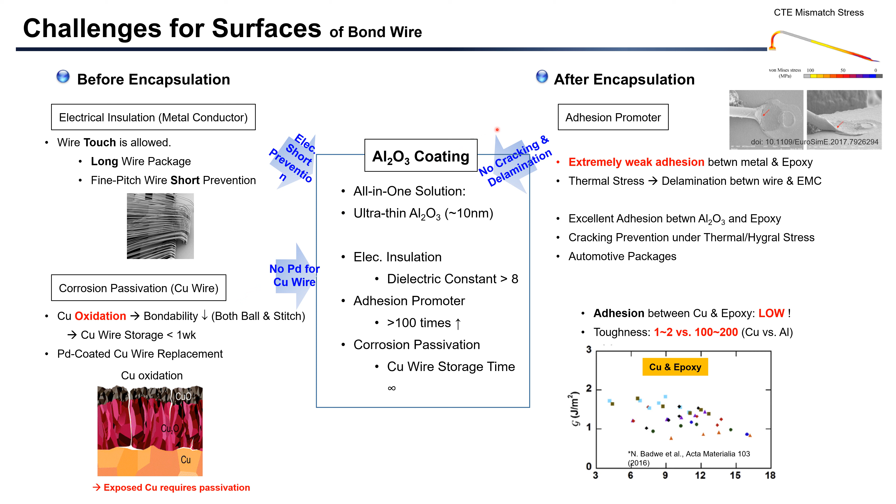Before encapsulation, metal bond wire does not provide electrical insulation. Metal wires do not provide corrosion passivation. After encapsulation, metal wires do not provide good adhesion to epoxy molding compound. On the other hand, aluminum oxide coating can provide electrical insulation, corrosion passivation, and good adhesion to EMC.

First, aluminum oxide coating on bond wire for adhesion promoter. On your left-hand side, wire cut is one of the typical failure mechanisms in harsh environment. Because of CTE mismatch stresses, debonding occurs between wires and EMC. This is an interfacial fracture between the wires and EMC. These interfacial cracks grow long enough and then a wire cut occurs because the wire alone has to carry all of the thermal stresses without help of EMC. Typical solution is to increase the wire diameter because the bigger wire can carry a bigger stress.

On your right-hand side, if we introduce aluminum oxide coating on the surface of the conventional bond wire, you can increase the adhesion so we don't have interfacial cracking between a bond wire and an EMC, so we don't get to have a wire cut failure.

For instance, on the conventional bond wire without adhesion promoter, when we apply the deposition of an outer metal additional layer so that we can induce the interfacial cracking, and when we apply the stitch bonding, which is nothing but external mechanical loading, we have seen terribly weak adhesion. However, when we introduced aluminum oxide coating as an adhesion promoter and applied the stitch bonding, we don't get to see any interfacial cracking. From a different perspective, because now we have a better adhesion, we can decrease the wire diameter for cost reduction purposes.

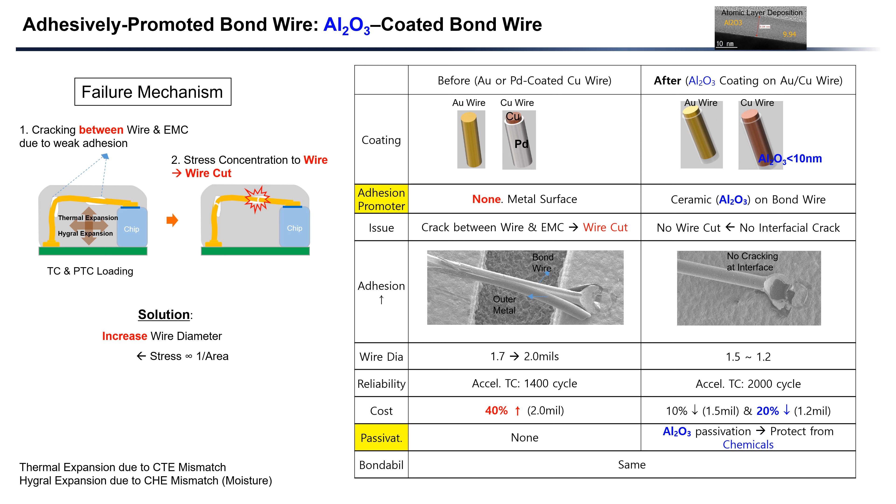Electrically insulated bond wire. When a bond wire has electrical insulation, they may touch with each other. There's not going to be an electrical short problem. And for this particular application of a long wire between two semiconductor chips over a long distance, this bond wire has to withstand its own weight. This is not very easy to do, but when a bond wire has electrical insulation, they may sag a little bit, they may sway a little bit, they may touch with each other a little bit. There's not going to be an electrical short problem. From a different perspective, if the wires are allowed to touch each other, we can also reduce the diameter of a bond wire for cost reduction purposes as well.

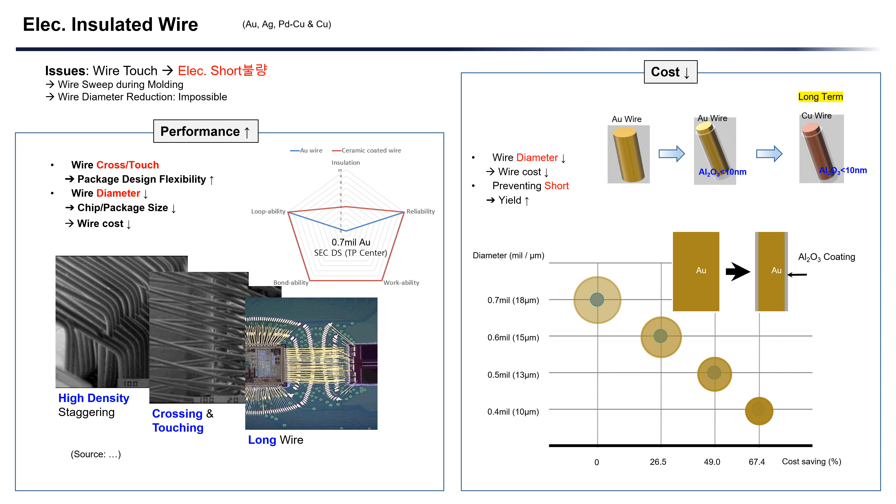On this slide, I'm going to explain how we ended up with coating aluminum oxide on bond wires. Previous work: at ECTC last year, we presented aluminum oxide coating on PCB copper pad. This year, we are presenting aluminum oxide coating on bond wires. On your left-hand side, at the top, you're seeing a gold wire bonded to a typical aluminum pad. This aluminum pad always has a native oxide on its surface, very thin aluminum oxide. However, it allows good bondability and reliability. That is described by this 2014 paper.

And on your right-hand side at the top, we made the deposition of aluminum oxide on PCB copper pad in order to replace conventional surface finishes of gold and nickel on top of copper. And we presented a lot of data in terms of bondability and reliability last year at ECTC. Today we are making a deposition of aluminum oxide on the surface of a bond wire. Why not?

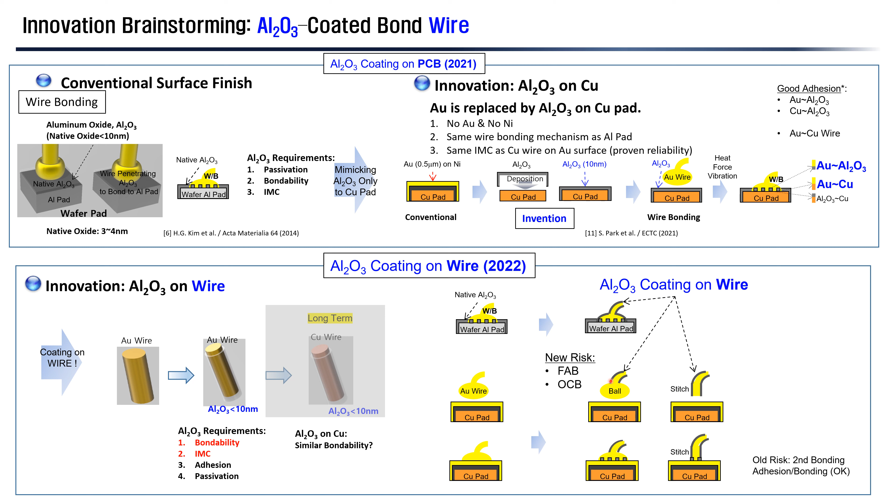The only new risk coming in as we introduce aluminum oxide coated bond wire would be free air ball formation and OCB, because a bond wire is completely surrounded by the aluminum oxide coating. That's what I'm going to talk about in the next slide.

Aluminum oxide was coated on a bond wire by making use of ALD, atomic layer deposition, because ALD is very well known for excellent conformal coating. Precursor for the ALD deposition is trimethyl aluminum, and H2O is a reactant. As a result, you get aluminum oxide deposition. Byproduct is CH4. A single process creates 1/10 of 1 nanometer, so you have to repeat the same process as many times as you want until you achieve the desired thickness of aluminum oxide.

On your right-hand side, you're seeing a special chamber for coating aluminum oxide on a bond wire. This is the chamber for the ALD process. You're seeing a special spool for coating aluminum oxide on the wire. When a wire winding is finished, this whole thing is moved into the chamber for the ALD deposition.

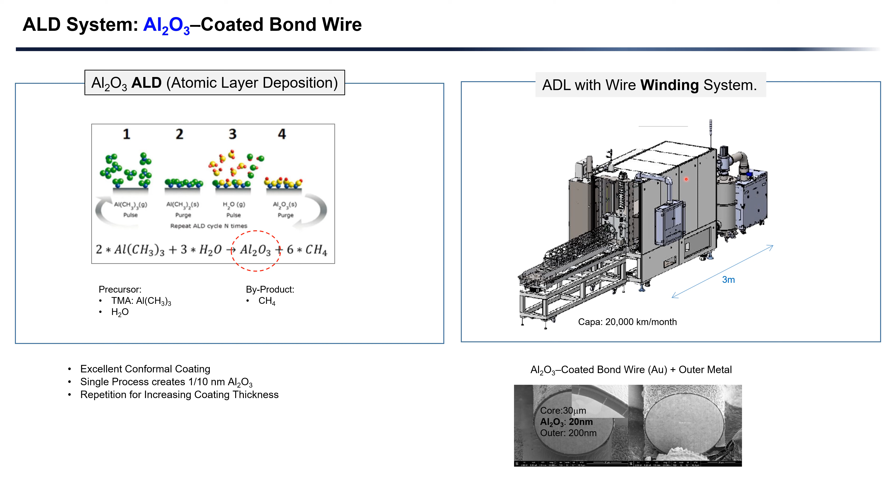On this slide, I'm going to show you the OCB sensitivity to the aluminum oxide thickness. The rule of thumb that we would like to propose is, for the case of a gold wire, when the diameter is greater than 1 mil, there's no OCB issue whatsoever with 6 nanometer thick or 8 nanometer thick aluminum oxide coating.

However, when you look at an ultra thin bond wire, 0.7 mil, there is a very strong sensitivity to the aluminum oxide coating. When aluminum oxide thickness is greater than 10 nanometer, we're seeing a very serious OCB formation. As far as the gold wire is concerned, with 5, 6, 7 nanometer thick aluminum oxide coating, there is no OCB whatsoever. We made a demonstration of 20,000 continuous bondings. We made use of a 0.7 mil gold wire and 6 nanometer thick aluminum oxide coating.

After we've done many tests, we came up with an OCB ranking. Number 1, conventional gold wire. Number 2, gold wire with aluminum oxide coating. This is very interesting. Number 3, silver wire with aluminum oxide coating, but no forming gas. No forming gas is better for the silver wire than forming gas.

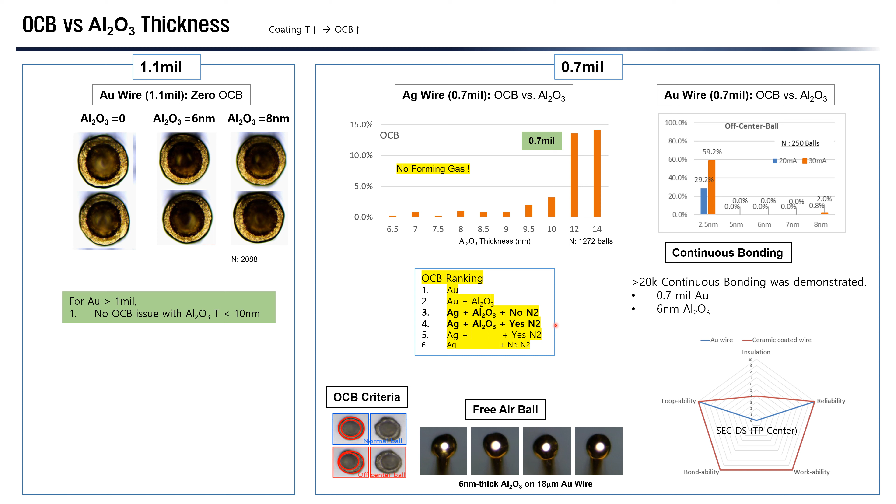On this slide, I'm going to give you a little bit of a sense of what the OCB mechanism is like. I'm going to explain why OCB is affected by the oxide on the wire surface and oxide thickness. When electrical energy is supplied to the bond wire, the bond wire is going to melt and form a molten ball, which is going to grow. But the bond wire right next to the molten ball, I would call it a TBMZ, to-be-melt zone, is nothing but a solid at a very hot elevated temperature. When a metal is exposed to high temperature, it is going to experience metal oxidation.

This oxide thickness depends upon wire material types and temperature. Of course, if this TBMZ oxide is very thin, there's no problem with OCB. If this TBMZ oxide gets thick, it does not break down gradually during ball formation. For instance, here on the left hand side the oxide layer is long, but it's not broken down yet. On the right hand side, the oxide layer has broken down, which creates a situation with no axis symmetry. Material is symmetric, geometry is symmetric, and the molten ball is symmetric. But the broken oxide layer on the surface of the bond wire is not symmetric, so it's going to interfere with the surface tension of the molten ball. That's going to trigger the OCB formation.

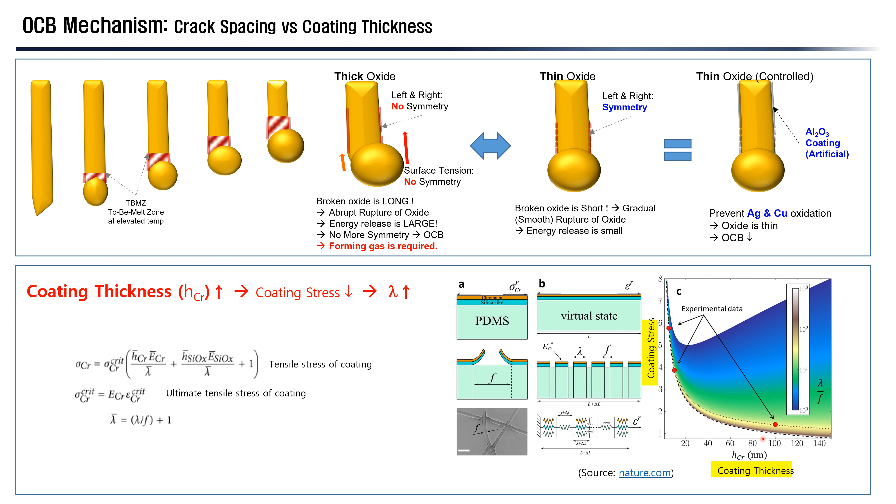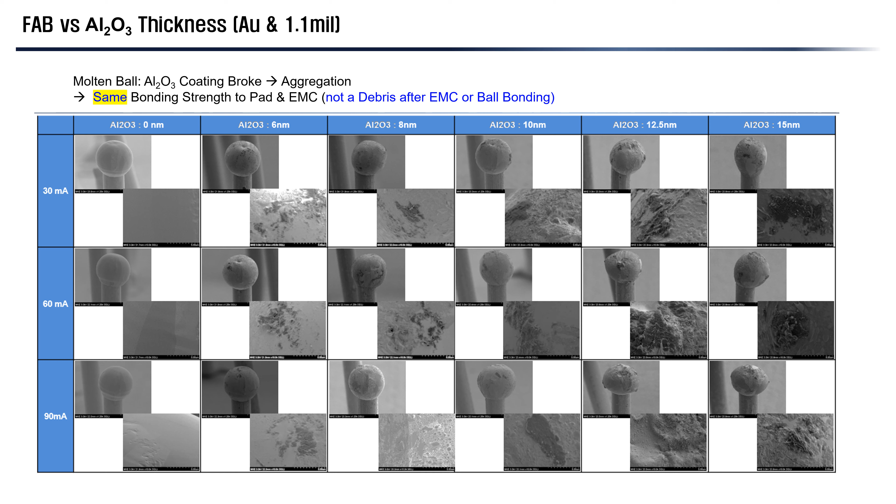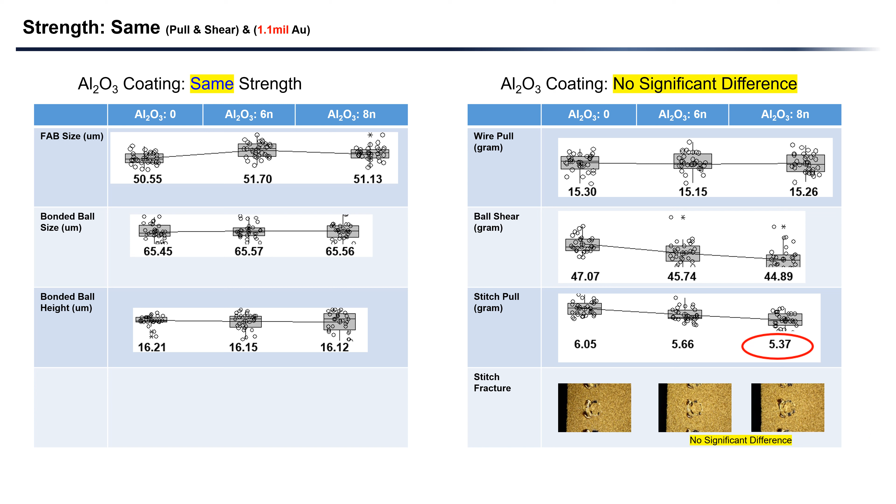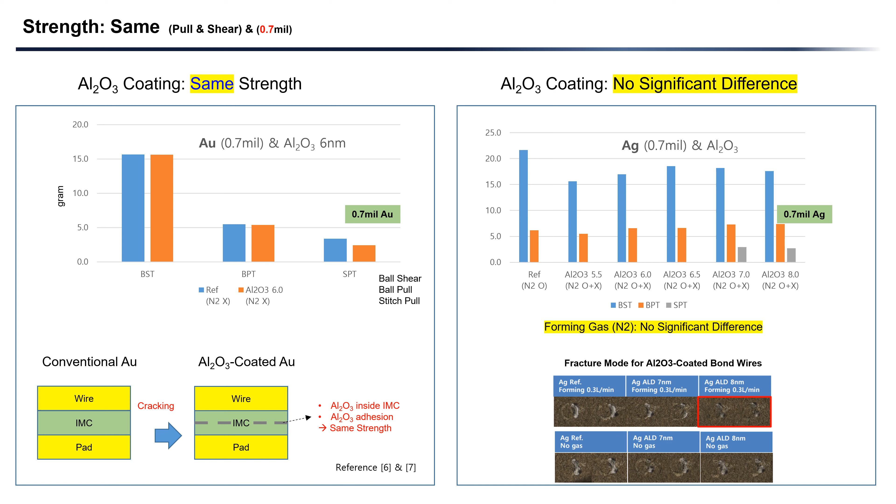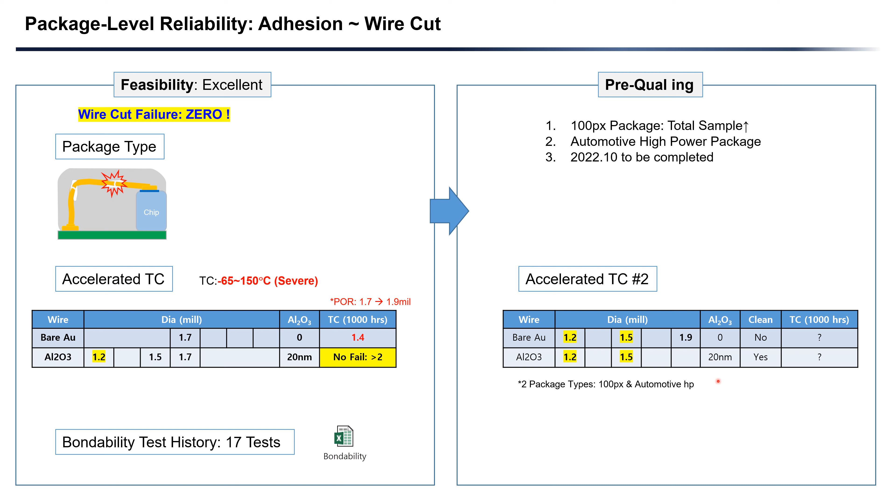For the conclusions, aluminum oxide coating can provide adhesion promotion, insulation, and passivation to conventional bond wires. Adhesion is increased by the introduction of aluminum oxide coating, aluminum oxide coating enhanced OCB for the silver wire, it shows the same bondability, and the lifetime of the package improved during thermal cycles by making use of aluminum oxide coating. That indicates that we can decrease the diameter of the bond wire, and that cost reduction is possible.